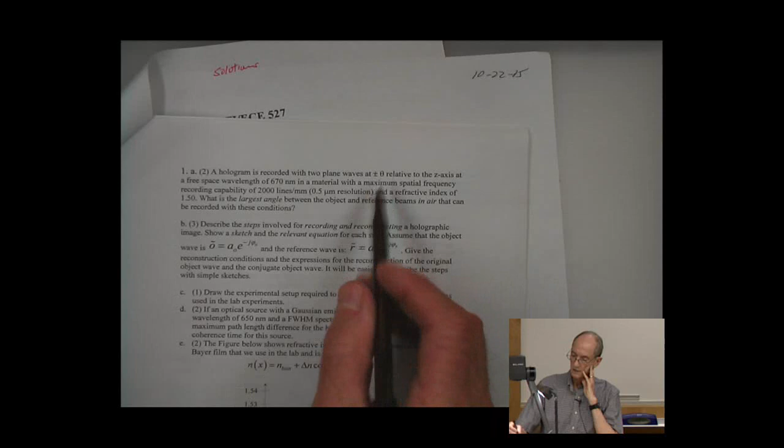Yeah, that's good. So look at some other information. I say you have plus and minus theta, so you have an unslanted grating. That means you don't have to really worry about the refractive index so much, because the grating - the fringes are going to be perpendicular to the surface like that, right? And if that's the case, think through this a little, just take a quick thought - see if you can get away with just using the grating equation.

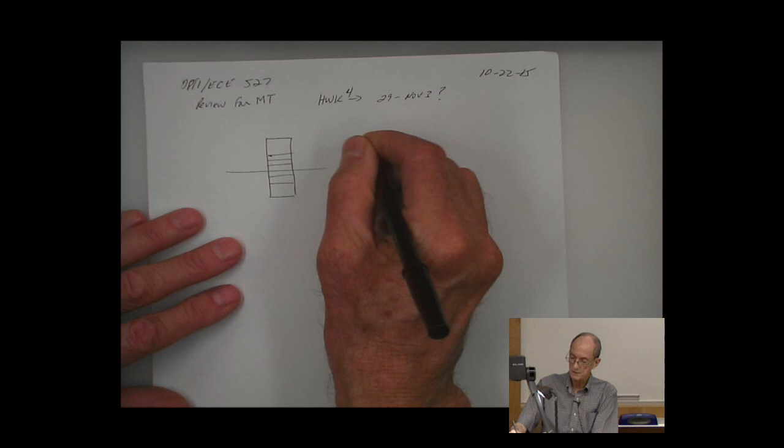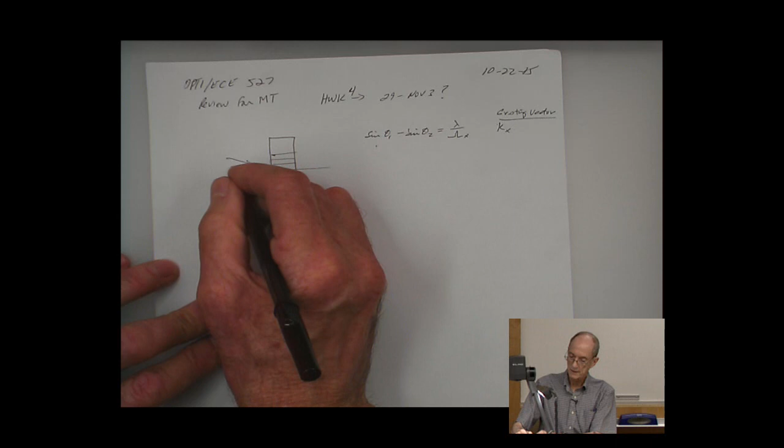Right, so the grating - this is just the... this is going to give you the x component of the period, the x component of the grating vector. But all I'm asking for is what's the maximum angle? So first off, these angles are - this is minus theta, and this is plus theta. So this is going to be 2 sine theta equals lambda over the period. And we had a wavelength of 0.67 and a period of 0.5. So that tells us - now divide that by 2, and we end up with the angle.

So if you divide it by 2, notice that's 1. So it's pretty simple: sine theta is equal to 0.67, and theta is equal to 42.067 degrees. And if we want the angle between object and reference, it would be... 84.13 degrees.

So again, just a simple question, asking you to take advantage of, for instance, the unslanted grating here, where the k vector is in the x direction, and we could then simply use the grating equation. Yes?

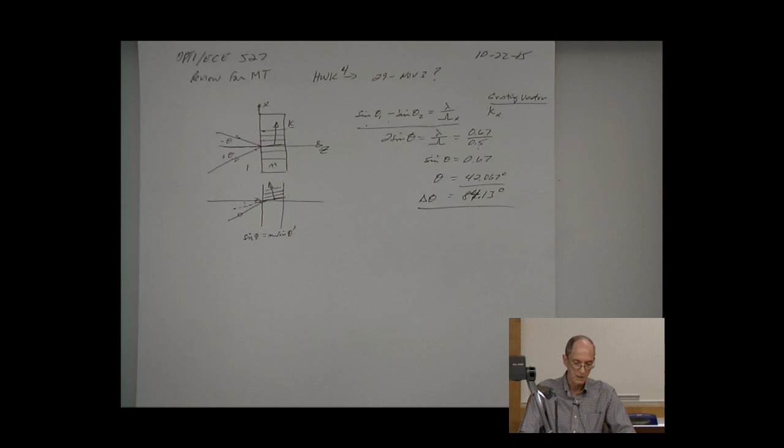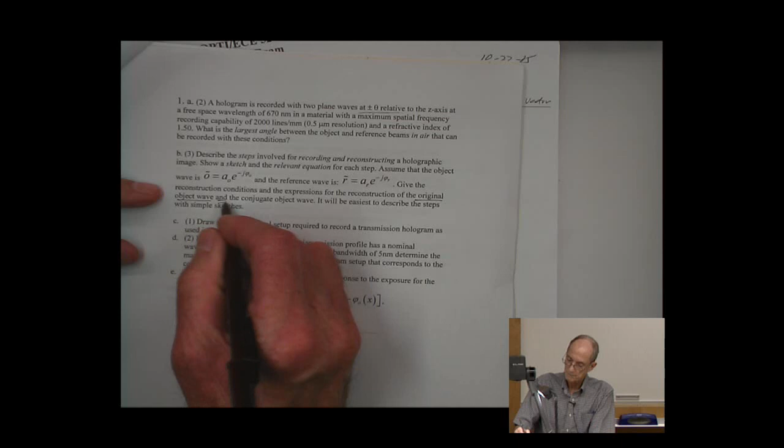Okay, part B: describe the steps involved for recording and reconstructing a holographic image. Show a sketch and the relevant equation for each step. Assume the object wave is O, A0 e to the minus j phi, and the reference beam is R, AR e to the minus j phi r. Give the reconstruction conditions and expressions for reconstructing the original object wave and the conjugate object wave. It'd be easiest to describe the steps with simple sketches.

So again, this is the holographic recording process. This is A, and this is B. The first step is, with R and O here, we form an interference pattern. So I is equal to O plus R squared - we've written this many times now, I'm just seeing if you remember it. This gives R O star plus R star O. These are all complex, and we substitute in the values for O and R: A0 squared plus AR squared, plus AOAR e to the j(phi O minus phi R), plus AOAR e to the minus j(phi O minus phi R). That's the first step.

The second step is we place some material there with our fringes, and we put something that responds to those illumination patterns, giving us a transmittance function with a proportionality constant relating the intensity function to that transmittance function. This is actually the hologram in a sense - this is the thing we end up with.

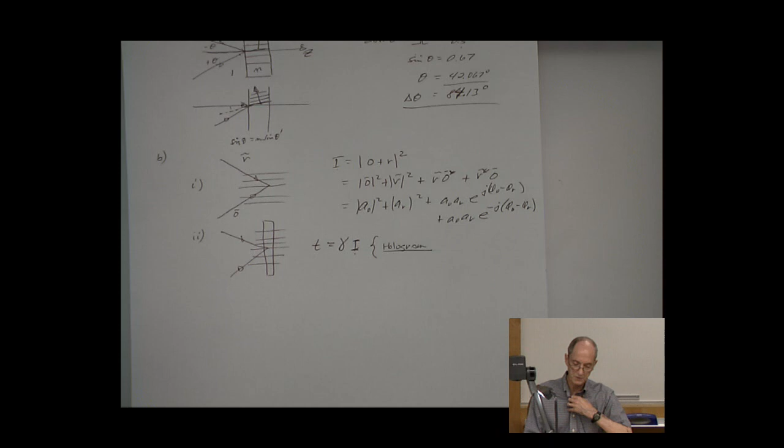Then for the reconstruction to produce the original wave, original O, we have here R and O again. We come in with the original, P equals R, and that produces O. So in this case, the reconstruction field is P equals R times T - that gives us the original object field.

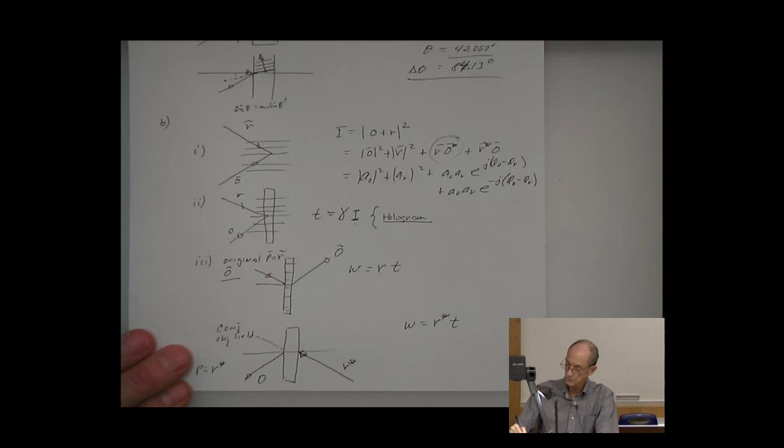Then for the conjugate object field, we want to get this term. We reconstruct with P equal to R star, so W equals R star times T. R star, if this was our original field coming in, gives us this back-propagating wave as our conjugate, producing O star. Again, this is something I want you to take away from the class: understand the process for forming and reconstructing a hologram, both for the original object and for the conjugate of that object.

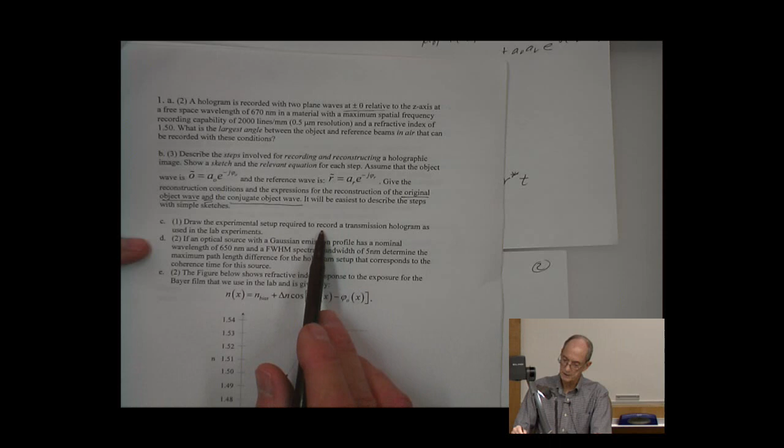So the next question here is kind of a giveaway. Draw an experimental setup required to record a transmission hologram as used in the lab experiments. We've done this a lot of times. Hopefully the distance learning students are not at too much of a disadvantage because I've gone through this in class, so even though you didn't do it with your hands, you should know what this looks like.

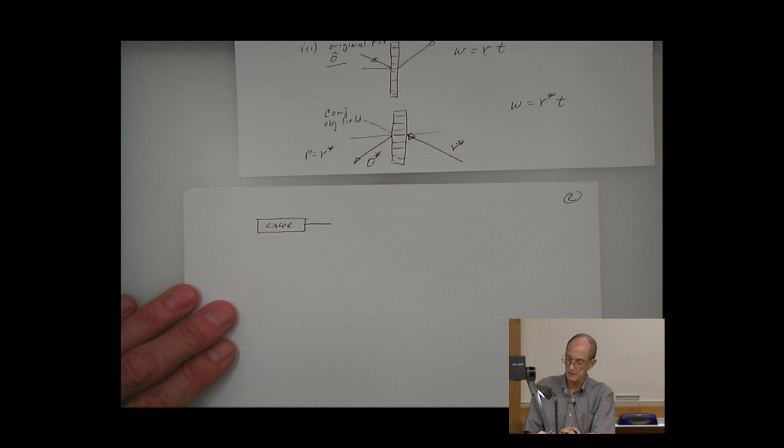So again, we have a laser. The beam coming out of the laser is a nice pencil beam with a diameter of maybe a couple millimeters or a millimeter or so. Then we use a beam expander that consists of a microscope objective, focuses that light through a pinhole, so this acts as a spatial filter. Then the beam comes out of that, and we collimate it with a collimating lens.

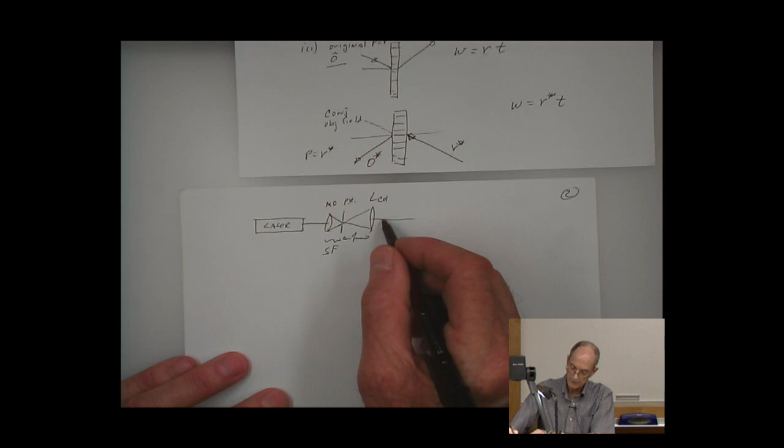And so then that beam goes out, and we have to divide it in some way. So we use a beam splitter, which allows the beam to propagate in two directions, so we have two different paths that we can manipulate, and we end up setting up really an interferometer, right? So this is a set of mirrors, M1 and M2, we have our beam splitter there, and here is where we would place the film.

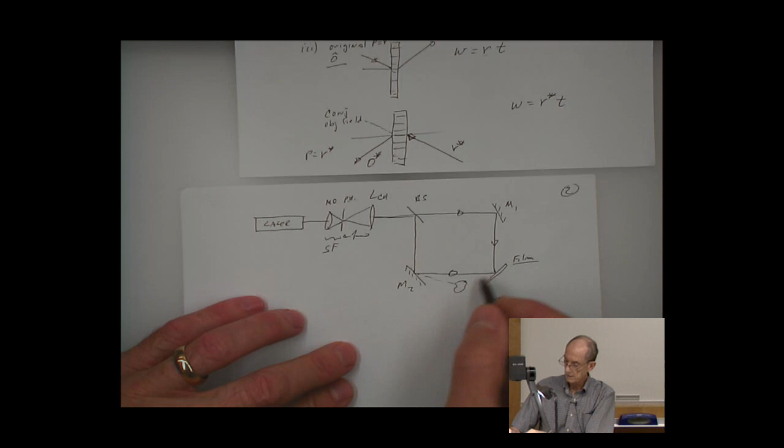And then if we wanted to record some object, we could have this illuminate a little object here, and the light would come out to form a kind of image hologram of some sort of object. So again, that's just something you should know when you graduate from this class.

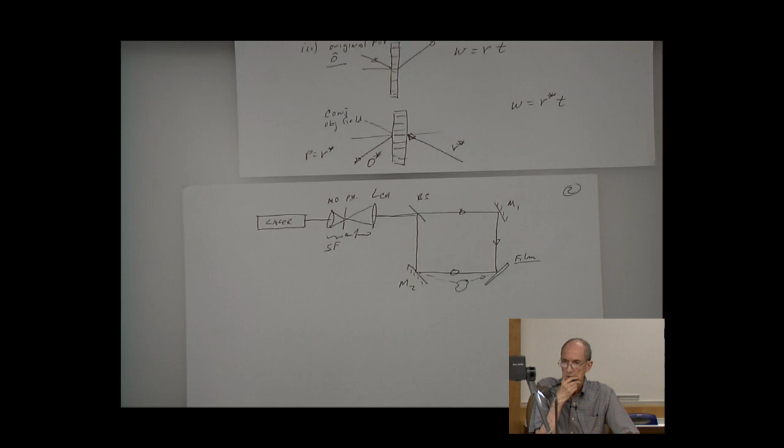Yeah, so in this setup I understand everything that's going on. What would you necessarily expect us to have as far as labeling? Because I see all the different components and understand that they're there. Do you need us to label M1, M2? No, it might be - if you just show it's reflecting like that, I'll understand.

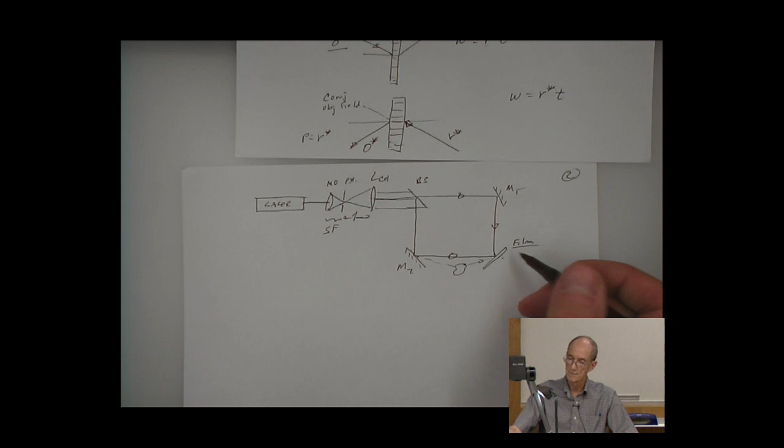Maybe label the spatial filter and collimator, because that has some functionality, since we need to expand that beam, right? So we're trying to get it - if you don't do that, we've got the microscope objective and then the pinhole and then the lens, you can just say spatial filter. So for instance, if you left out the spatial filter, I'd probably ding you a quarter point or something like that. If you left out M1 and M2, I probably wouldn't do anything. It'd be good to put where the film is, and probably the beam splitter, so you understand what's happening with that. But yeah, that's a good question.

So that's about the level of complexity I would want you to put down on that. Again, you don't have too much time, you have to think through things quickly and hopefully understand it. So I'm really trying to test that you know the basic things, making sure you know the grating equation and what that means, making sure you know what the holographic process is, making sure that you know how to make a hologram - you need an interferometer in order to make the hologram.

So that's kind of what you'll see here. There are some questions that ask a little more detail, but I try to be a little more conceptual on the exams and reserve the more detailed calculations for the homework sets, okay? Which I think in an hour and 15 minutes, you can't ask too much detail in a question. If I gave you an overnight take-home exam, it'd be different - yeah, I used to hate those because they were always a magnitude more difficult.

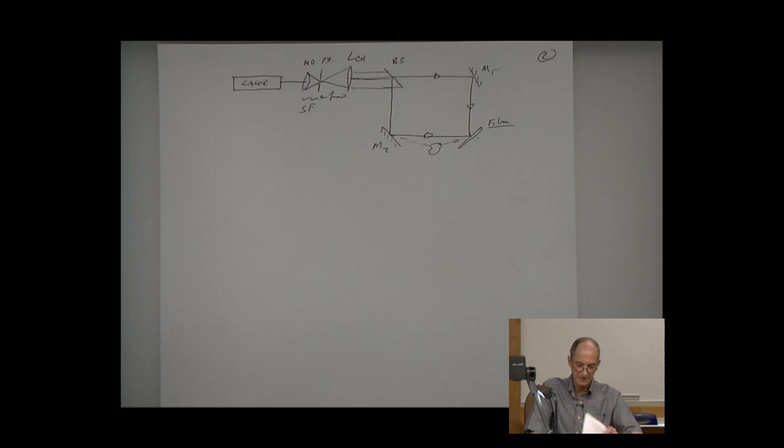Okay, let's move on here then. All right, so this question has to do with coherence to some degree. I'm not going to ask you anything on coherence on this midterm because, again, we didn't get that homework set in on time. But we know how to do this problem, so let's go through it.

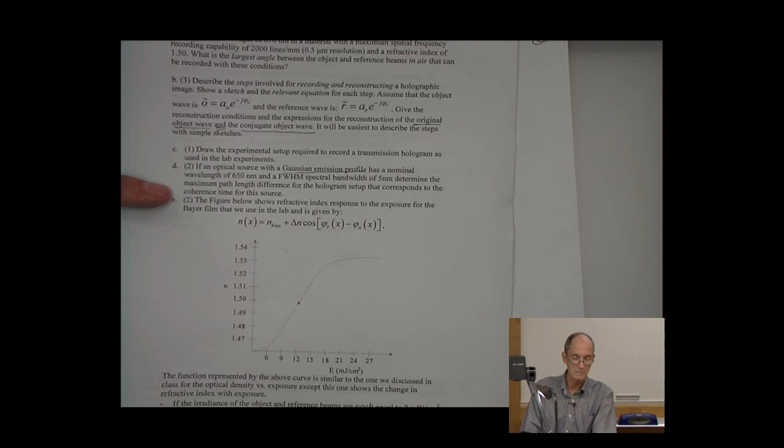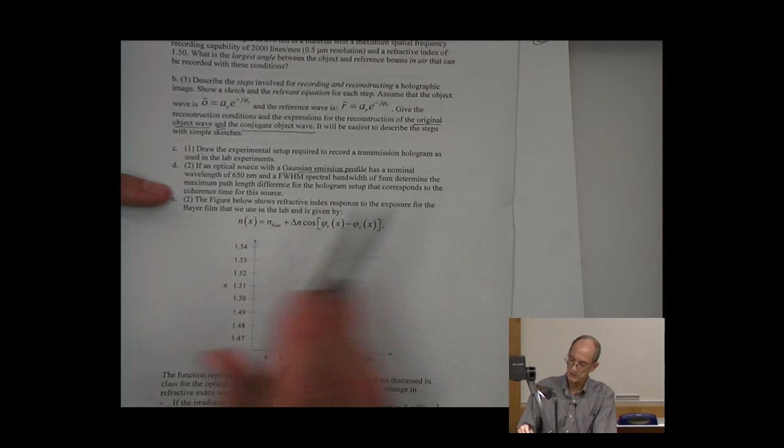So here we have an optical source with a Gaussian emission profile. We talked about these different emission profiles - they have different bandwidths due to the broadening process in the medium. And so it has a nominal or average wavelength of 650 nanometers, full width half maximum of 5 nanometers. Determine the maximum path length difference for a hologram setup that corresponds to the coherence time for this source.

So here, what that would involve - a question I might have asked, maybe on the final, would be: how far apart can I separate one of these arms, or how much leeway do I have in the path length difference for these arms, which is what I'm asking in this question. So here we have a Gaussian profile with a lambda bar of 650 nanometers and a delta lambda of 5 nanometers.

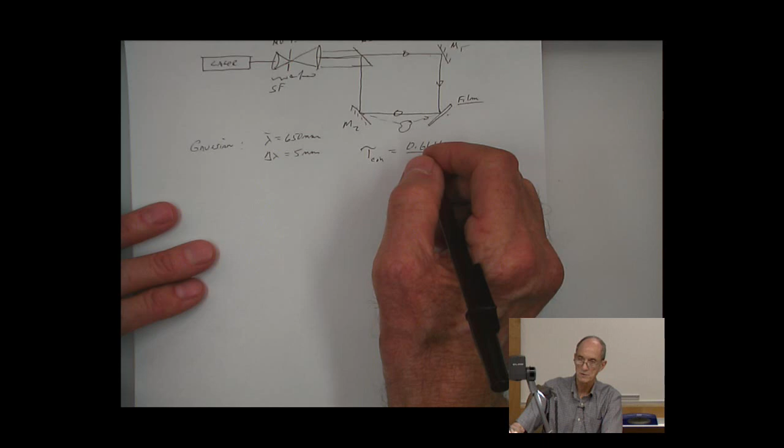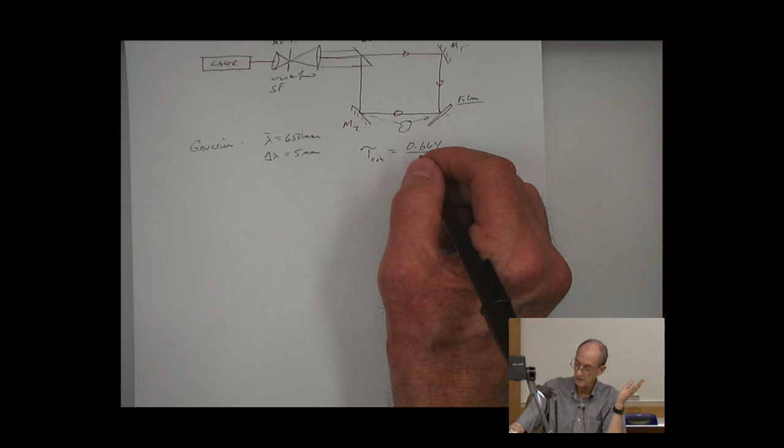And so the Gaussian profile, remember we said that for that we end up with a coherence time which was 0.664 - there was a square root of 2 ln 2 in there, 2 pi ln 2 and so forth, and that all boiled down to 0.664. If you put another value in, that's fine, you'll just have to calculate it.

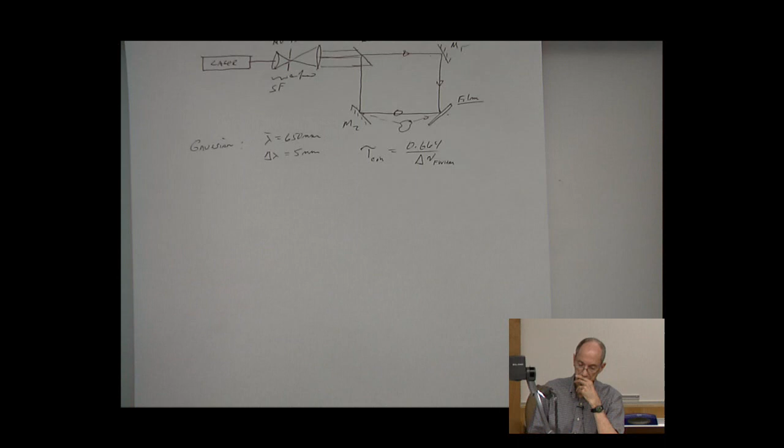So we need the delta nu full width half maximum. So how do we get that? You should know that nu is equal to c over lambda. So if we take a delta nu, or a derivative of this, we end up with minus lambda to the minus 2 delta lambda c.

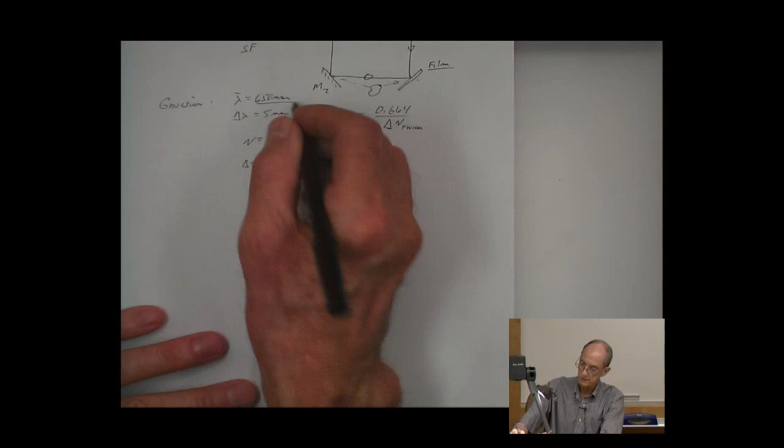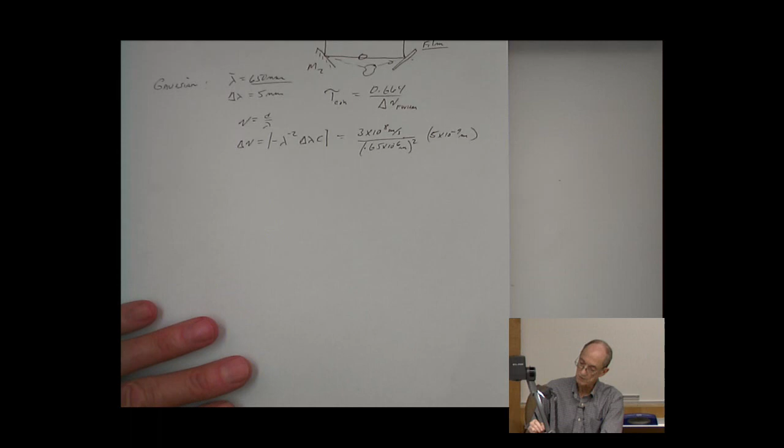So for a 650 nanometer wavelength and speed of light, with a bandwidth of 5 nanometers: 3 times 10 to the 8th meters per second over 0.65 times 10 to the minus 6 meters, squared, times 5 times 10 to the minus 9 meters for the delta lambda. So we end up with a delta nu here, which is 3.55 times 10 to the 12th hertz.

That's the value that we need, and so we put that in there and we end up with 1.87 times 10 to the minus 13 seconds. The coherence length is c times that coherence time, and that's about 56 microns. So not a very large coherence length for that source, but that's what you get when you have bandwidths of like 5 nanometers.

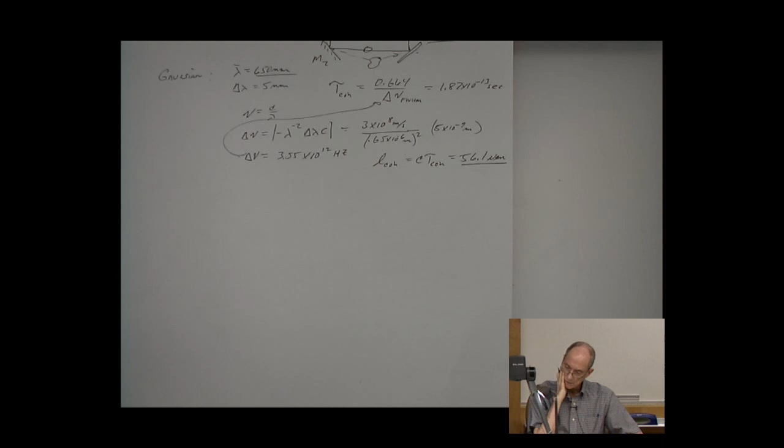So that's that. Any questions on that? Okay. What part of the question is this? That was question 1D. There we go, D, that's it.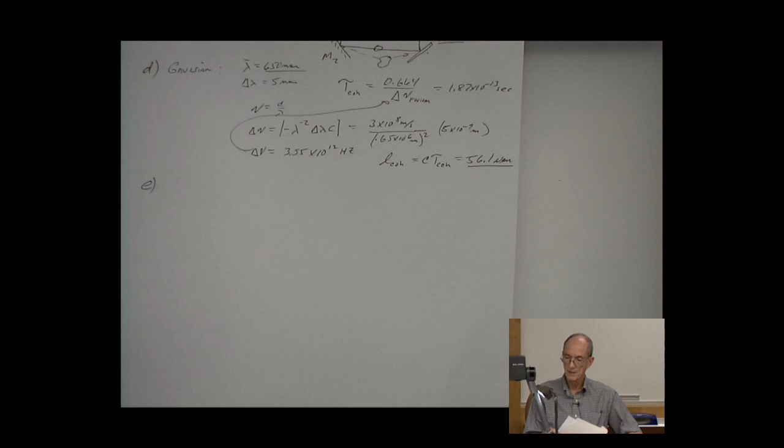And now we're getting to question E. Now, question E has a lot going on - I have a graph, I have an equation, I have a lot of discussion, but the problem is actually pretty simple. So let's look at it.

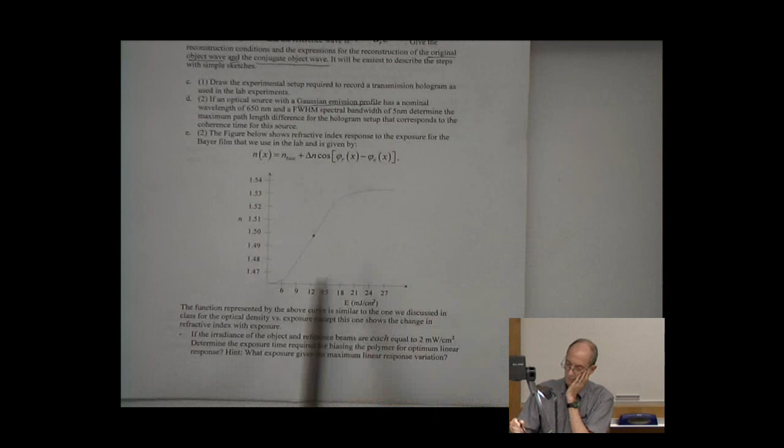So here again is a material response to an exposure energy density that we have. This is millijoules per centimeter squared, and this is the refractive index for the phase material, which is our polymer Bayer material that we're using. Before we talked a little bit about the Hurter-Driffield curve, where you had density versus exposure. So this is a little bit different - here we have refractive index versus exposure. But the idea here is the same.

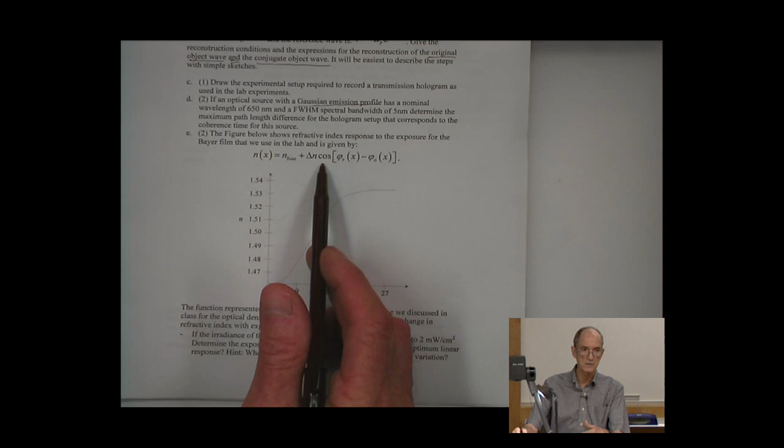We have a curve which is nonlinear down here, and then it becomes linear in this region, and then it saturates and again becomes a nonlinear curve out beyond a certain exposure range. So if you're making a good hologram, what you want to record is something that looks like this - a kind of linear response to the exposure to give you this nice cosinusoidal function in the index modulation. So as I said, this looks similar to the optical density versus exposure curve.

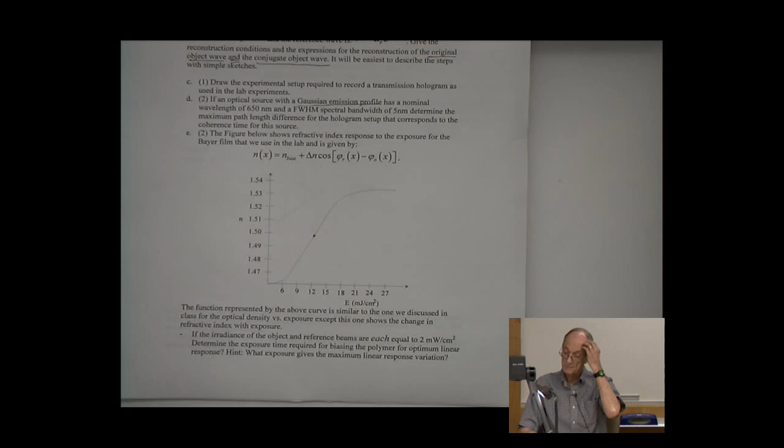Now the question at the bottom: if the irradiance of the object and reference beams are each equal to 2 milliwatts per centimeter squared, determine the exposure time required for biasing the polymer for optimum linear response. Hint: what exposure gives the maximum linear response variation? I won't put this point in here - if I gave you this, I put this point in afterwards - but you want to bias it right in the middle of that linear range.

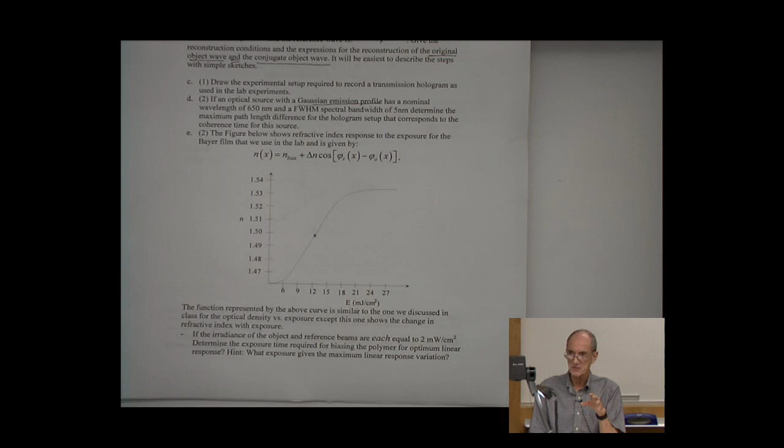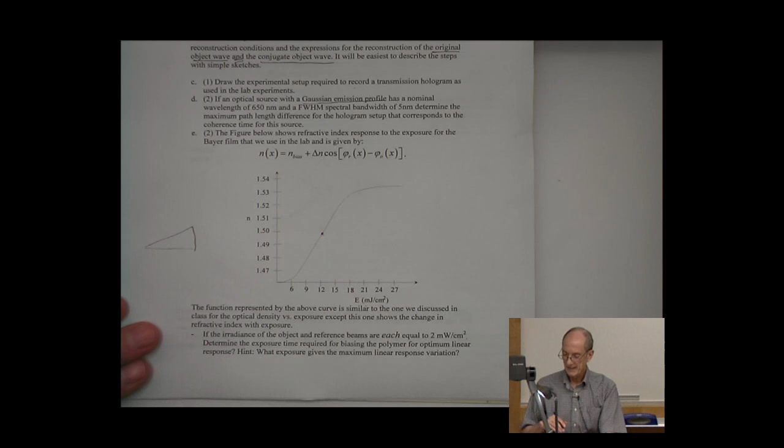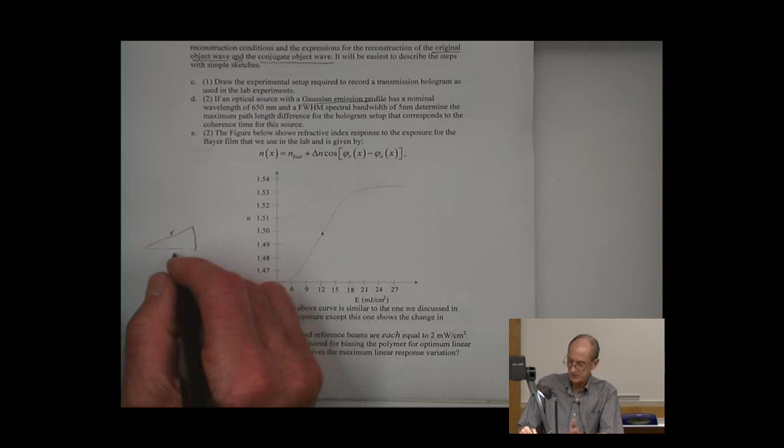I saw this really funny thing - I went to Blue Willow Restaurant, they have a great little concession where you buy cards. They had a thing on F's on exams, and on the cover there was a triangle problem - find X - and they gave 1 and 2 or something like this. And somebody wrote an answer - here it is.

And they circled it. The question was find X, and I just found that to be hilarious. Anyway,

Don't worry, no F's. You guys are graduate students.

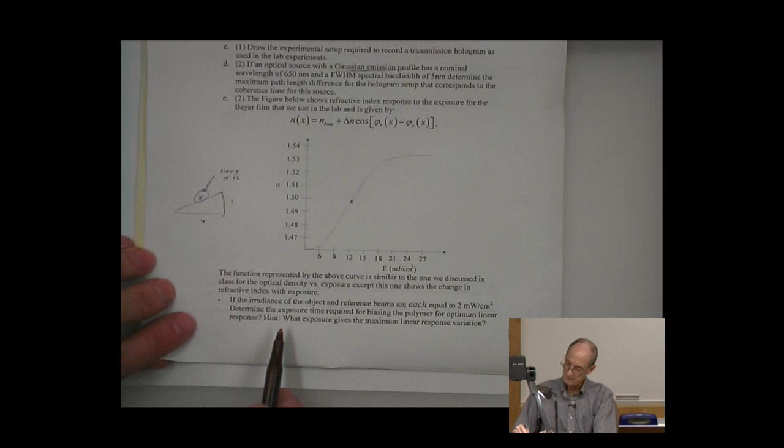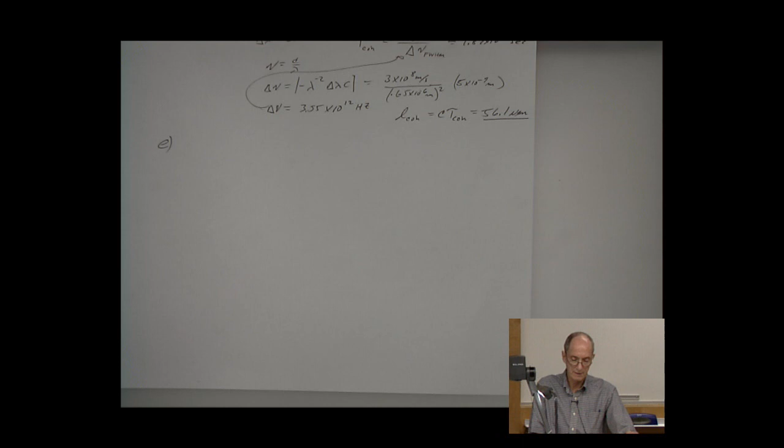So anyway, you want to bias this right in the middle of that response curve. So how do we do that? Well, this is just like we did in the labs, or talked about in class, when making exposures. So here we have two exposure intensities, I1 equal to I2, equal to 2 milliwatts per centimeter squared. So I average, when you do your recording, you have I1 plus I2, so this is 4 milliwatts per centimeter squared.

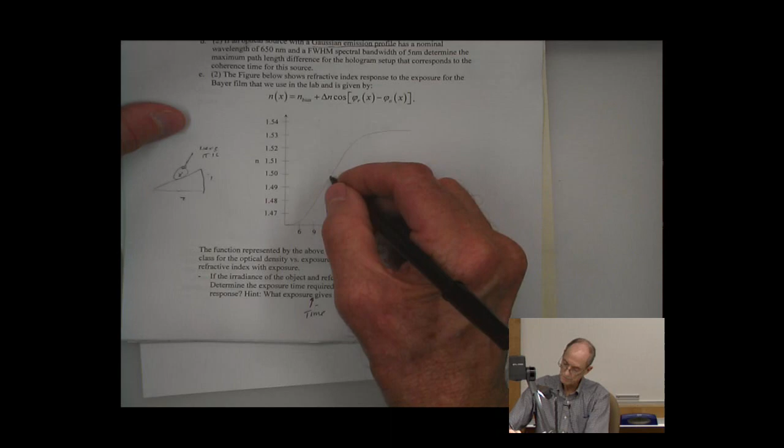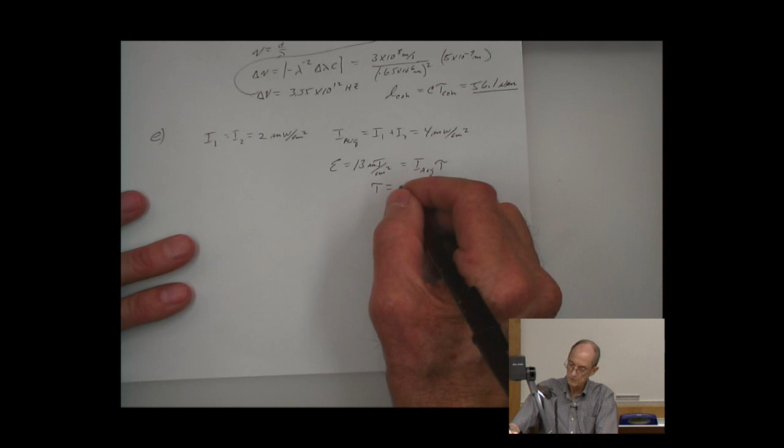So what we need to know is the exposure time that gives maximum, that's what I was really after. So the exposure that gives you an exposure energy density of about 12, 13, something like that, if you look here on this curve. So with that, we have an exposure of 13 millijoules per centimeter squared equals I average times tau, right? So here you can see that tau is going to be equal to about 3.25 seconds. Okay, so just like you do when you make a holographic exposure, oftentimes if you have a material, you'll do a characterization to come up with this nice curve for the material.

Okay, so in your hint, you asked for the exposure for the maximum linear response variation. What does that mean? That means the variation in exposure can go the largest extent about this value and still be in the linear region.

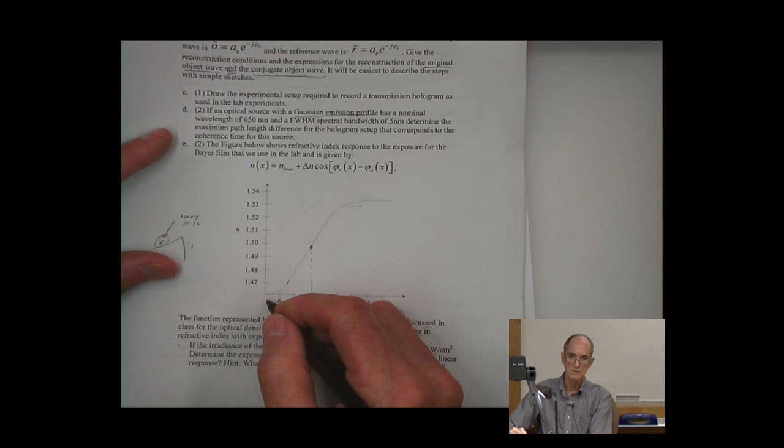When it starts to get up here, you're going to get some nonlinear terms, some higher order terms. And when it starts to go down here, you're also going to get some nonlinear terms. It's just like an op amp or something. When you're trying to make an analog amplifier out of it, you have a range you drive the voltage to that'll make it nonlinear, and you hear kind of crazy sounds if you're using it for audio amplification. So same idea here. You have a material that has a response, you need to bias it, and then you can modulate it in the linear range.

Okay, that was question 1. Question 2. So we have this holographic lens that I like to show and use a lot. And so you want to compute the magnitude and direction of the grating vector at point B.

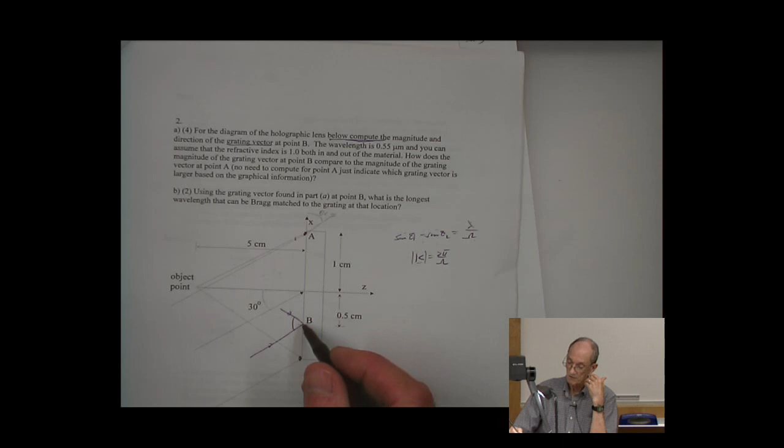Okay, so here's B, and I already drew it in here. Now we have a situation where it's not an unslanted grating, it's a slanted grating, too many double negatives. But I let you assume that the refractive index is 1, so you don't have to worry. Everything is 1, so a mysterious material with a refractive index of 1. So we're just going to worry about calculating the grating vector there without worrying about Snell's law.

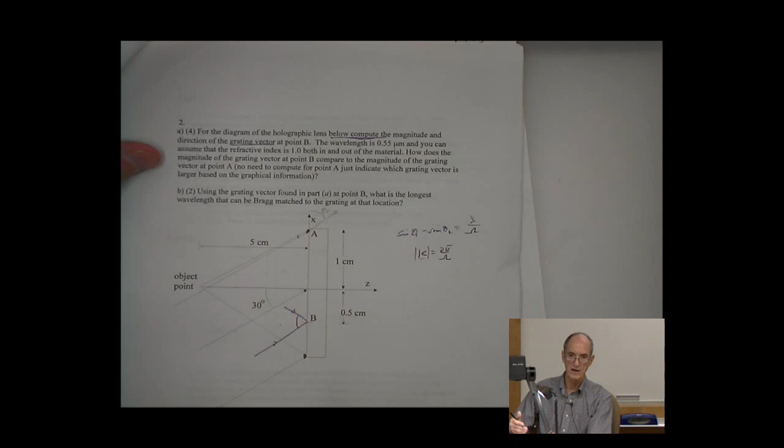If I didn't say this is 1, and then you would have to do that. It's a little more calculation, but it doesn't really tell me any more information about what you know. I know you know how to use Snell's law, so I can have you do that on the homework. But here in the test, I just want you to show me the grating vector.

If we were to do that, it's Snell's law first, then figuring out the grating vector, K1 minus K2, correct? Okay, so again, if I did give n, say this is 30 degrees, you calculate what your new angle is on the inside for that. You have to calculate what this angle is here. This is 1/2 centimeter down and 5 centimeter over, so that tells us what this angle is coming in as well. And then you would have to refract that into the medium as well, and then do the calculation.

So why don't we set it up, and then we could do it so that we have a refractive index there as well if we need it.

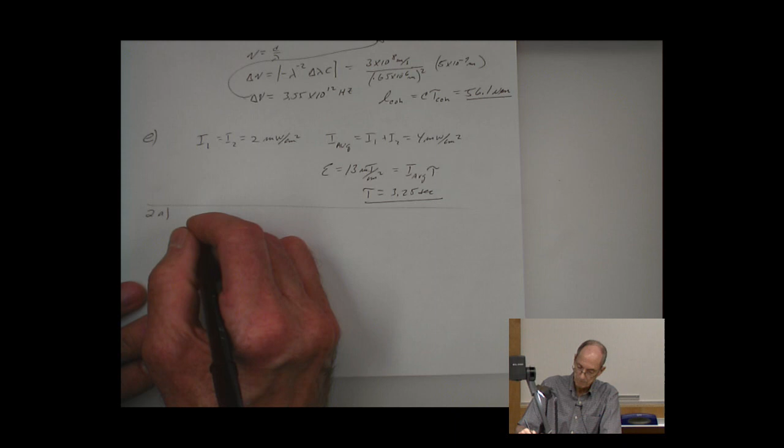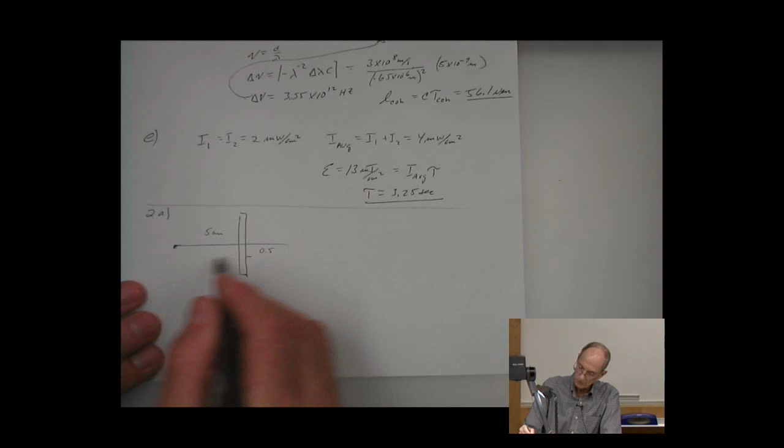Okay, so 2a. First off, we have this here, and this is 5 centimeters and 0.5. So that angle, theta 0, we just have tan theta 0 is equal to 0.5 over 5, 0.1.

So theta 0 is 5.71 degrees. Theta r, of course, is 30 degrees.

All right, so we have 30 and 5.71. And now we know what the wavelength is here: 0.55 microns, and we have n equals 1, but we could change that if we need to.

Using the Bragg matching condition, K0 equals Kr minus K, or rearranged, K equals Kr minus Ko. The sign here isn't really important, so you actually have two answers because it's not unique in that sense. The K vector could point one direction or the other. The magnitude will be the same because it's based on the difference, whether we had Ko minus Kr or Kr minus Ko, it'll give us the same value.

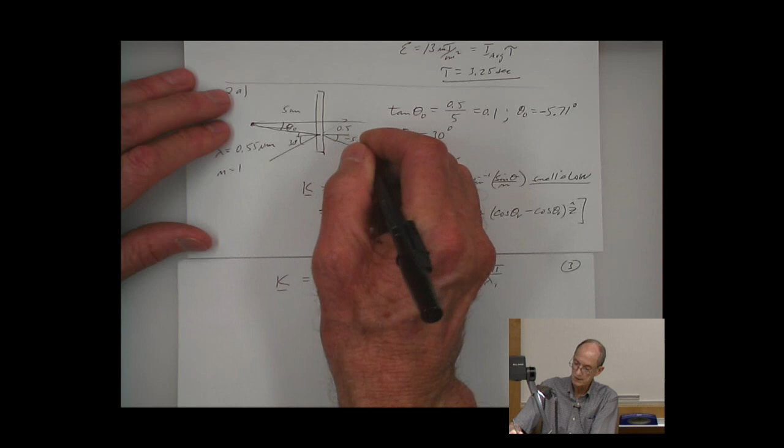So this angle, this 5.71, is actually a negative angle, because according to our convention, it's coming down like this, where this one is going up. So this one is minus 5.71, and that's plus 30 degrees. You've got to pay attention to that.

And so the magnitude of K is going to be—we square these two, add them, take the square root—and we end up with 2 pi over lambda 1 times 0.61322. If we multiply all that out, putting in 0.55 for the wavelength, I got 7.005 inverse microns. Those are usually the units because the wavelength is in microns.

All right, so that's part of it, and then the other part is the angle—the K vector angle relative to the z-axis. We can get that simply by taking the arctan.

of x over z. So we have 0.5995 over minus 0.12901, so we end up with a minus sign out here. Okay, and that gives minus 77.9 degrees.

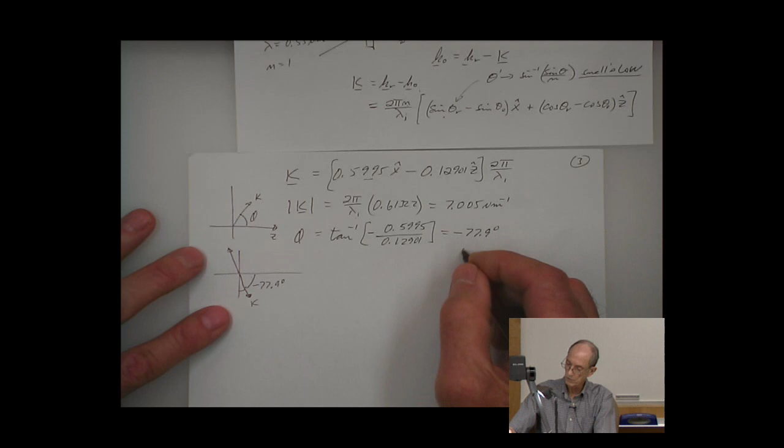So that means, though I didn't really draw it right here, the K vector can be either minus 77.9 degrees, or it could be 102.1 degrees—sort of this same angle, roughly 180 degrees over, or plus 102.1 degrees. Either of those two angles are okay.

Do you definitely want us to give you that angle, or is it enough just to give you that x? Let's see, what did I ask for? I think I actually asked you to compute the magnitude and direction of the grating vector. I don't know, I feel like direction, because you did it in vector form.

I would have left it in vector form. But you're saying you want the angle? Well, since I asked specifically for the magnitude—that's part of the vector, yeah, but what's the magnitude of that vector, what's the direction of that vector? That's a little bit different. If I just asked for the grating vector, you're fine. But if I asked for the magnitude and the direction, then I'm asking you specifically how it's oriented. Otherwise, if I just said the vector, that would be fine.

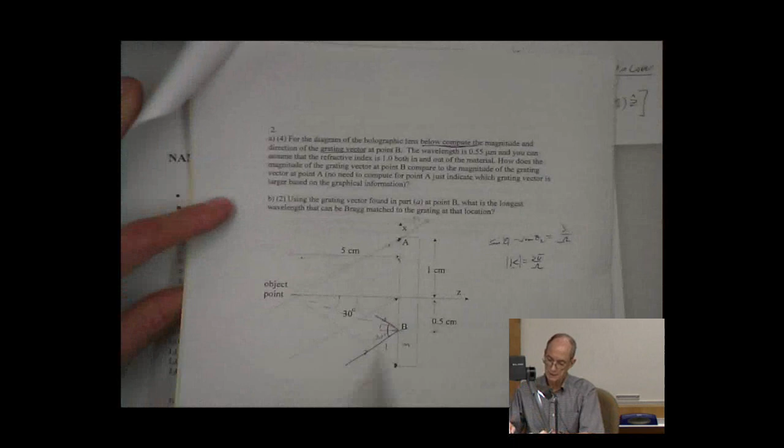And then I ask, how does the magnitude of the grating vector at point B, which we just computed, compare to the magnitude of the grating vector at point A up here? No need to calculate, just look at it and tell me the answer. So what's the relationship here? Which grating vector has a bigger magnitude?

B has that inverse relation, right? The greater this interbeam angle, the finer the fringes. So these are very coarse up here, and these are very fine over here. Remember, the magnitude is inversely related to those fringes. That's something I want you to internalize in your thinking. So that was just a concept, do you know what I'm talking about here?

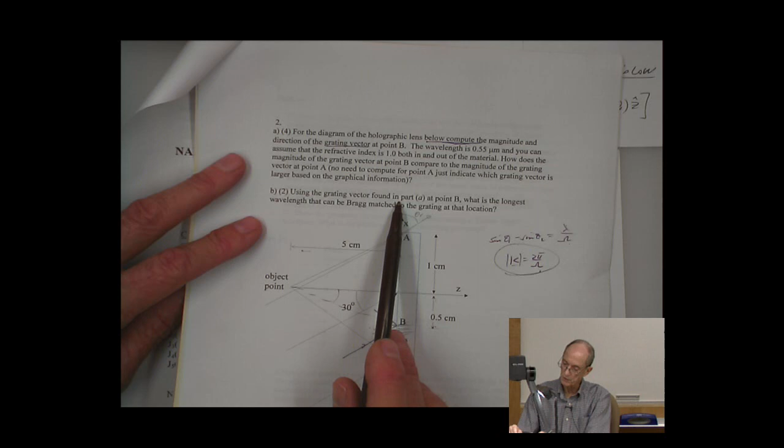Some of the basics. Now, using the grating vector found in part A, which we just found, at point B, what is the longest wavelength that can be Bragg matched to the grating at that location? So what am I talking about there? This is part B. So I have a grating vector. How do I determine the longest wavelength?

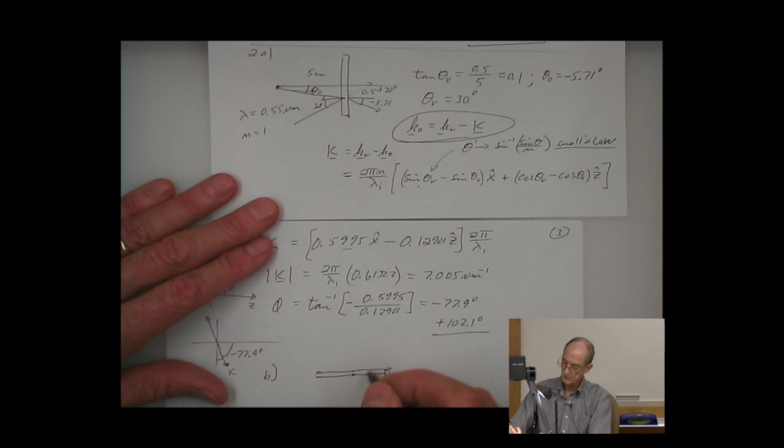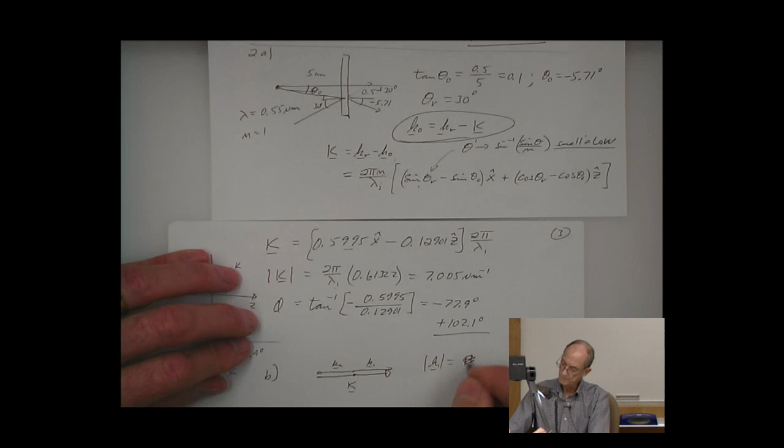The longest wavelength that'll still be Bragg matched is the shortest vectors that will still satisfy that relationship, right? And produce a k-vector closure, or a vector closure condition. So here is k1 and k2, the two vectors, and here's k. So k1 magnitude equal k2, k over 2. That will give you the

longest wavelength, and so that wavelength that we would have is equal to 2 pi over the wavelength, wavelength 2 here. Using this value, or if we look at this, we can come up with the period and not do the 2 pi calculations, because this then is equal to pi over the period, right? And so lambda 2 is about 1.8, 1.79 microns. So another little trick on an exam too is, if you can keep things in terms of 2 pi for a while and see if you need to multiply it out, it'll save you a multiplication step if you don't care to do that.

Okay, so now we have another part of this problem. So I'm kind of cheating, I'm giving you 3 questions, but actually not, right? I'm giving you more than that. But I'm kind of grouping them into different topics here. Okay, so let's look at this.

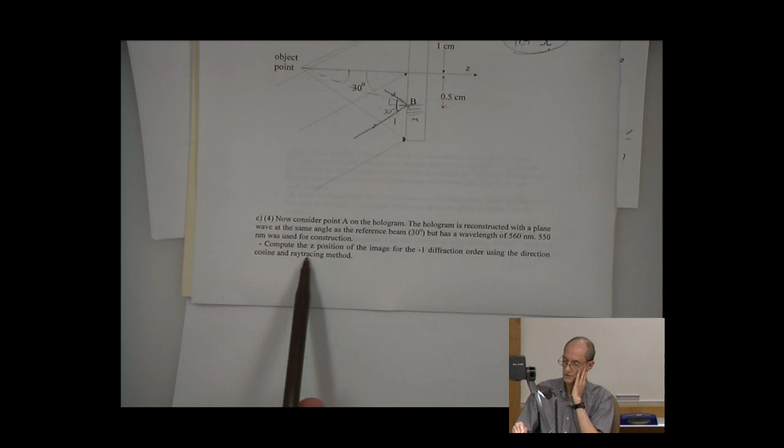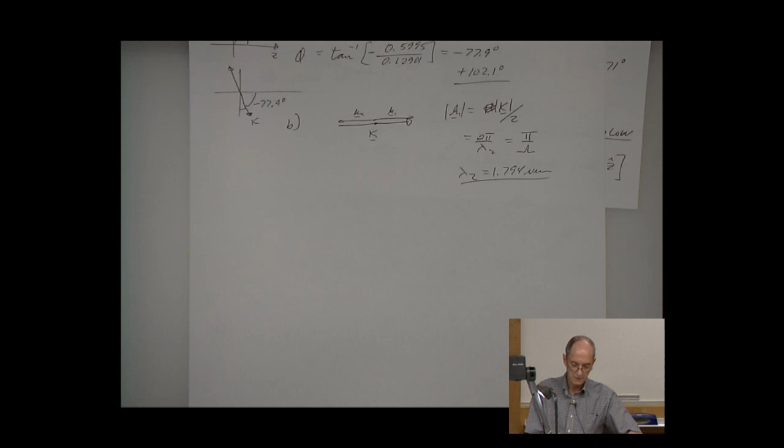So now consider point A on the hologram. The hologram is reconstructed with a plane wave at the same angle as the reference beam, 30 degrees, but at a wavelength of 560 nanometers, and 550 nanometers was used for construction. Compute the z position of the image for the -1 diffraction order using the direction cosine and ray tracing method. I'm not asking you to use the paraxial image relationships, specifically asking you to use the ray tracing relationship. So we have to solve this using... oh, and by the way, the numbers in parentheses next to the problems are the number of points the problems will be worth, so you can get a sense of whether this involves more calculation based on the number of points I'm asking for.

Okay, so let's look at this part C here. We're going to reconstruct it at theta p equals 30 degrees, that's our reconstruction. And so now we need the direction cosine. So first off, what am I after? I want to find where the image ray—this is the hologram plane here, and this is the image ray that I have out here—where it intersects this z-axis. Let's see how we can get that.

All right, so here again, we have L0 is equal to xh minus xo over O, and so what is O? O is the distance vector. We have coordinates on the hologram itself, right, that we were looking at—point B was a half a centimeter below the axis. So we have xh minus xo squared plus yh minus yo squared plus zh minus zo squared in general. That gives us the distance of that object ray.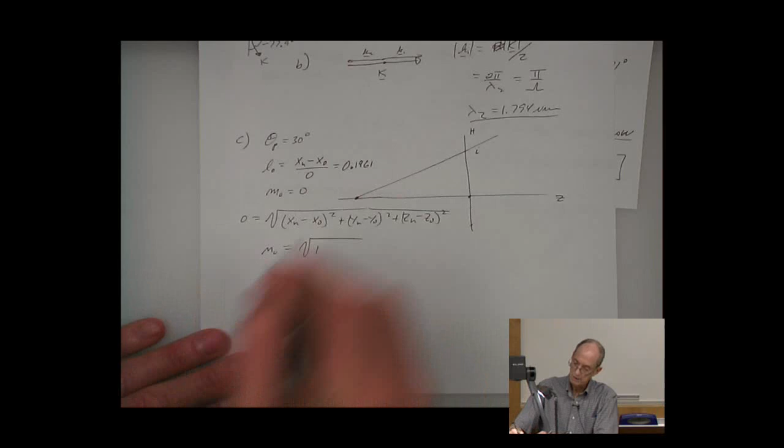And the object ray actually went back to a point down here, I think, for that position B. And then for MO, we don't have to worry, MO is equal to 0. And NO is equal to square root of 1 minus this. This works out to be 0.196. So NO is 1 minus 0.1961 squared, and that gives me 0.9806. Okay, so for those direction cosines like that.

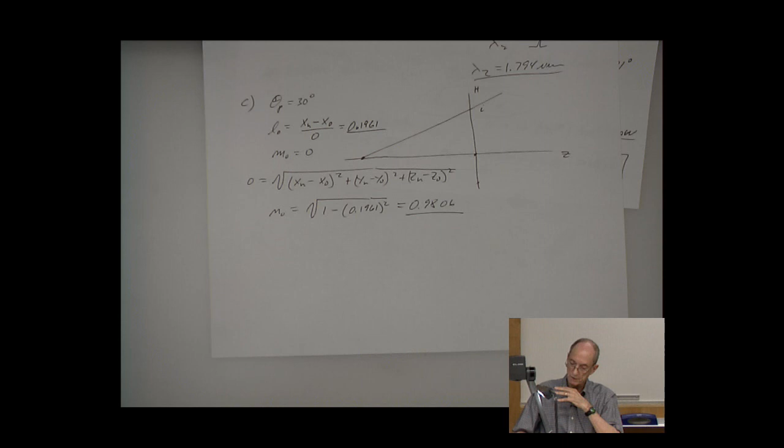All right, now we also need LR, MR, and NR. So if we look at this—oh yeah, so we were looking at point A, that's 1 centimeter up here. That's why, okay, we're not, yeah.

All right, so we're looking at this point here. The object ray direction cosines refer to the angle relative to the x-axis, that's our alpha value. So this should be alpha here, right? Alpha is this angle. This angle was 30, so that angle is 60, okay?

So here we then have LR is cosine of 60, which is half. NR, correspondingly calculated like that, is 0.866, okay? And then we have LP, again with this 30-degree incident angle. LP is equal to 0.5 and NP is equal to 0.866. Now, one thing we have to do here as well is that we have a mu which is not equal to 1. We have a lambda 2 which is different from lambda 1. So this is 0.56, this is 0.55. So mu is 1.0182. All right, so we do have to worry about that.

So now we can solve this by looking at, again, so we get Li. Li here is equal to LP minus mu LO minus LR. And so we end up with Li, putting in our numbers, 0.19057, which means that Ni is, again, square root of 1 minus Li squared. And actually this, again, it's a radical, so we have plus and minus. And so this is equal to plus and minus 0.98167. So we have to choose the right NI angle. And so we're going to choose the negative one because that's the one that's going to lead back and give us an intersection.

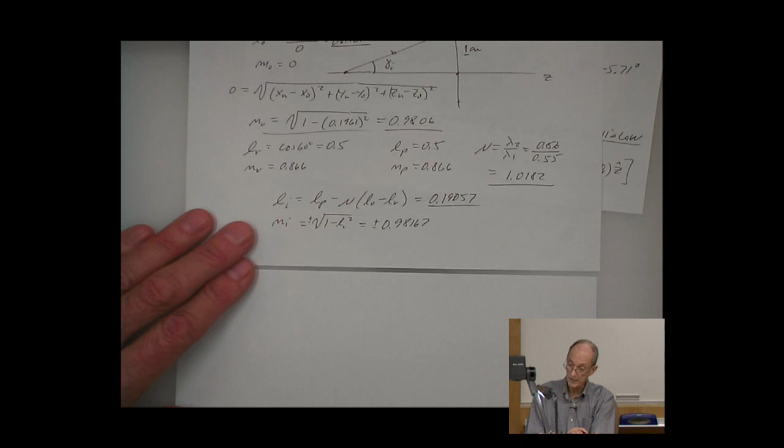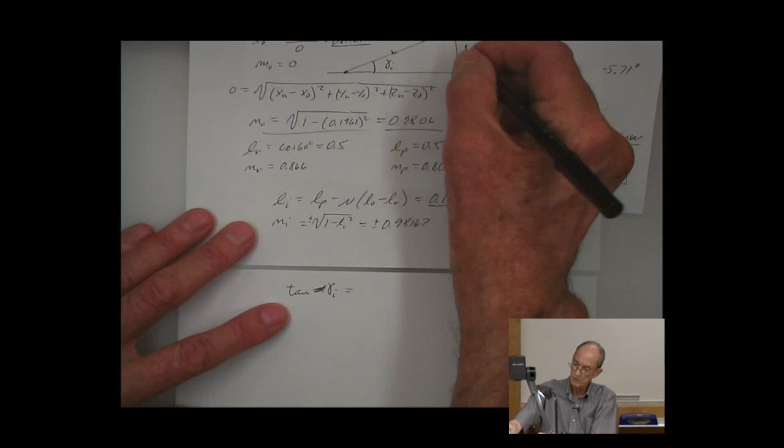So why, so this is kind of going like the way we developed the ray trace relations before, because this angle now is gamma I, right? That's gamma I for the ray relative to the z-axis, and tangent of gamma I is what we want, because that, with a value of 1 here, is going to tell us what zi is going to be. So if we look at the tangent of that angle, that's equal to 1 over zi, okay? And so from this, we have that zi is equal to minus 5.151. That's why, again, we knew that the distance was going to be negative here, and so we choose this value for Ni.

So that's what I was looking for there. Again, a question that kind of, I mean, there's some calculations there, of course, but again, the main point here is, how do I use these ray trace relationships for the hologram? What do they actually mean? Okay, so again, I will give lots of partial credit if you kind of lay out the method of doing this pretty well. Like, you have definition of your direction cosines, this relationship, of course, and maybe a diagram. And maybe you screw up your numbers, well, you'll get most of the credit for that problem, okay?

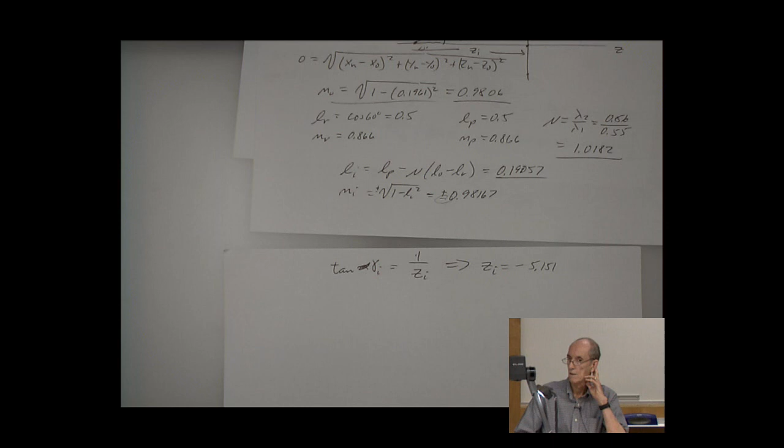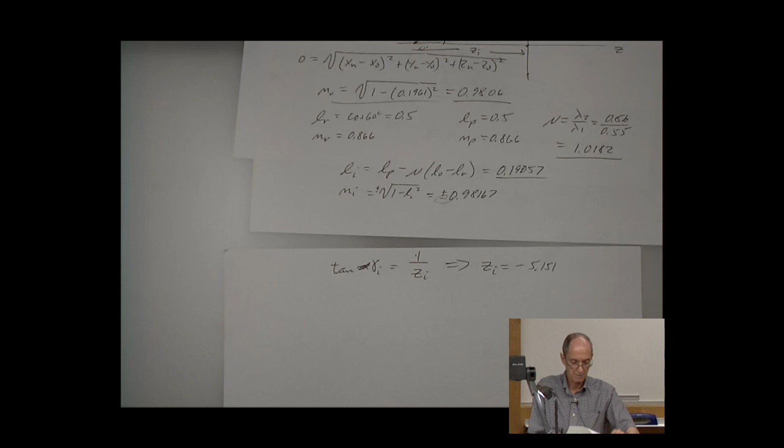How did you get your xn, xo, yn, z? How did I get this? Okay, so I have an object point, which was - so here's the object point, and this is located 5 centimeters away at 0. So XO is 0, and XH is 1.

Can I move your other diagram down? That's the hand-drawn one. The what? The hand-drawn one you do on the other page. Yeah.

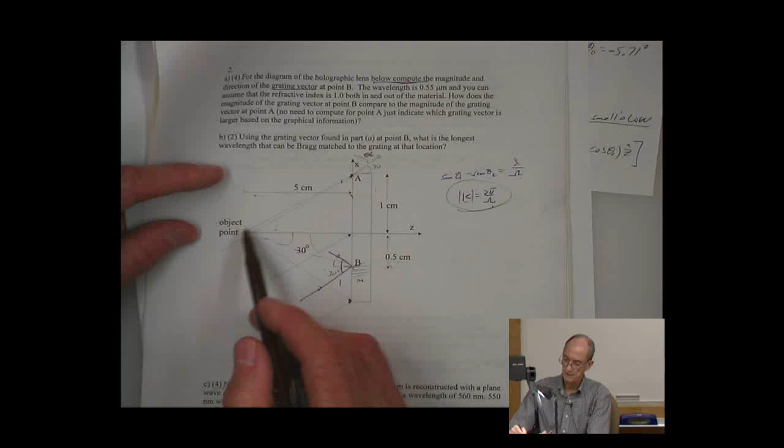So again, well, this diagram is showing the reconstruction more so than the formation here. This is telling us how to get - the question was, how do I get the direction cosines? Where do I get the coordinates from? So this is where you get the coordinates for that.

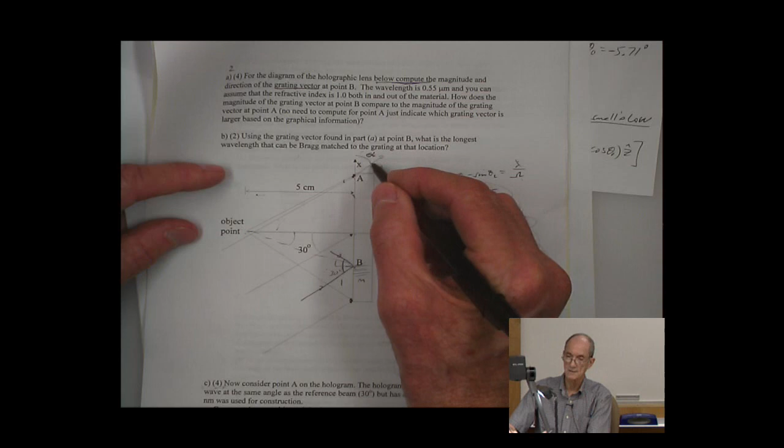And again, remember, if you have a beam coming from infinity, then you just take the cosine of that angle, right? Relative to, say, the z-axis - or I'm sorry, to the x-axis, is 60 degrees. So you get the direction cosine L sub r from cosine of 60.

So you're saying like xn is - you're saying xn is 0? X and xr, you mean? I guess I'm still confused.

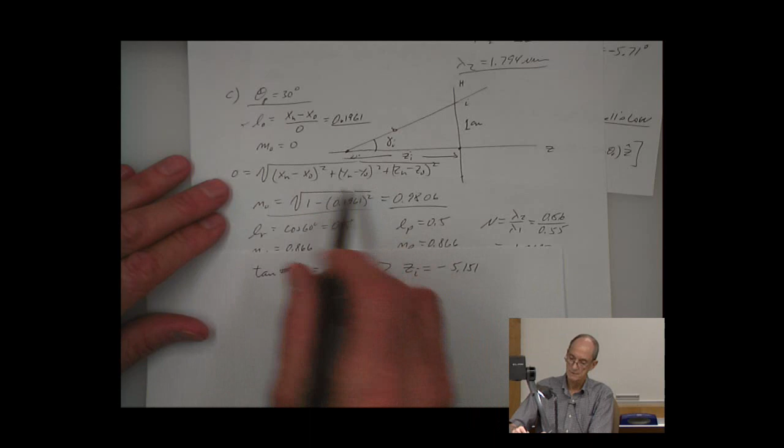Okay, so if I give you coordinates, this is a way for you to calculate what the direction cosines are. If I give you a beam coming from infinity and I give you an angle for that, you can get the direction cosines just from the angles for those plane waves coming from infinity. Okay? But you have points, and then these xh and xos are from the points that were - yeah, so again, XO was 0, XH was 1, and YH and YO were 0. ZH was 0, and ZO was 5.